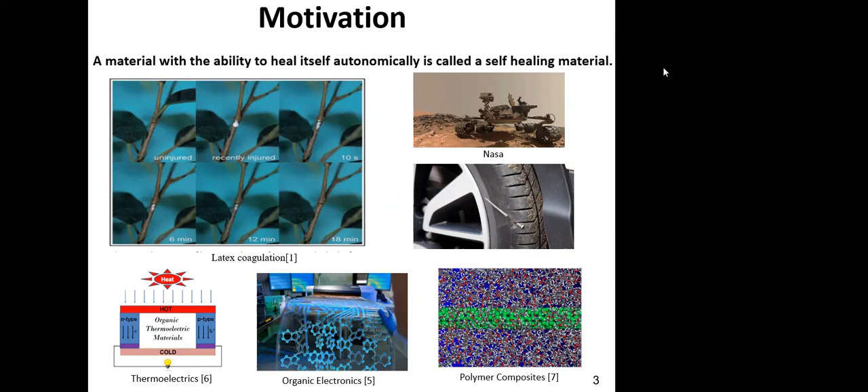As the title said, I'm going to talk about self-healing polymers. First, I would like to talk about what self-healing itself is. A material with the ability to heal itself autonomically is called a self-healing material. There are a lot of self-healing materials around us. It's a very prevalent phenomenon in the biological world, from plants and trees to humans. In human beings, from blood clotting to the repair of fractured bones, all of these involve the self-healing process.

Biological nature perfected it over millions of years of evolution. But now scientists and engineers are trying to figure out how to do the self-healing process artificially, in our engineering materials. If we can do that, it could wholly revolutionize our design spectrum. I've put an example here for you to appreciate it. This figure shows latex coagulation in a tree.

Let me get my laser pointer so you can look at it. It shows the latex coagulation in a tree. This tree is uninjured, and after some time it got injured. Then you see sequential time snapshots of how it is self-healing. After 18 minutes, it healed itself. So now scientists are taking inspiration from this phenomenon in the biological world.

So what could be the potential applications of self-healing materials? There could be a lot of applications. But the first one that comes to my mind is interplanetary missions, where NASA's Curiosity or Perseverance rover is now roaming the foreign terrain of Mars. If this vehicle got damaged, like its wheel or any other part, it's very hard to repair.

Like you need to send another mission or you need to abandon the mission. So in this case, consider if you can build some part of the vehicle, maybe its wheel, maybe some part, using self-healing materials. If it somehow gets damaged when running in this foreign terrain, if it can heal by itself, that would be the best solution. So that could save a lot of money. So that could be a wonderful application.

We are all familiar with flat tires, especially in the summer. So if your tire is made of self-healing materials, it could save a lot of money. Other applications could be polymer-based composites. The polymers have the potential to revolutionize the composite field, and also organic electronics. And last but not least, polymers have inherently very low thermal conductivity. So if you can somehow engineer their electrical conductivity, they have the potential to be in the thermoelectric field as well. And there could be a lot of other applications, you name it. So let's move forward.

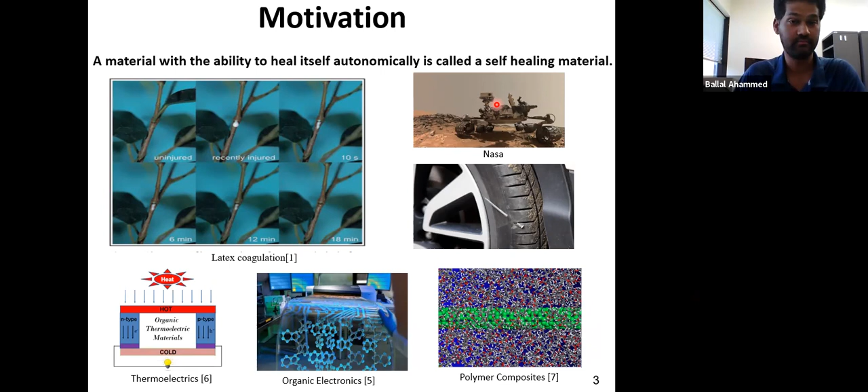Now, approaches to self-healing. There are a couple of approaches in the literature. One is called the capsule-based approach and another the vascular network-based approach. I like to describe them together because they are pretty similar. In these approaches, you have small microcapsules or tubular networks inside the material matrix, containing healing agents. When a crack appears, some capsules or the vascular network get ruptured, the healing agent comes out, undergoes some kind of polymerization or reaction, and helps heal the material.

But looking at the pictures, you can surely say that the capsule-based and vascular network-based approaches are very complicated to design. Also, they cannot sustain a large number of cycles. If it healed once and the same crack appears in the same spot or some other spot, it will not be able to heal, because the capsules or vascular network that ruptured won't come back. So the number of cycles it can operate is very limited.

Lastly, another approach is called the intrinsic approach. It can be done by reversible reactions, hydrogen bonding, ionomeric coupling, or molecular diffusion. In my project, we have used this intrinsic self-healing approach. In our case, the atoms are capable of dynamic bonding. They can associate and dissociate, again and again, based on thermal fluctuations or external stimuli from the environment. So there is no restriction like the capsule or vascular network. They inherently have dynamic bonds, which help them heal by themselves.

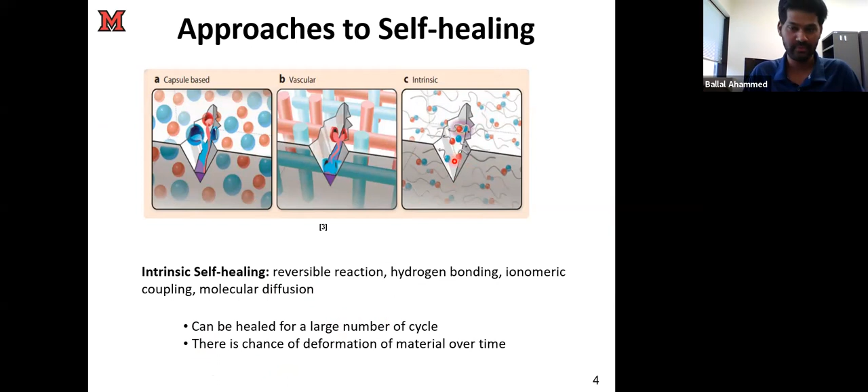As there is no capsule or vascular network, it can be healed for a large number of cycles. But the disadvantage is that there can be a chance of deformation of the material over time. So let's now put all our concentration on this intrinsic self-healing approach, as we have implemented it in our materials. Okay, let's move forward.

The objective of this study was basically modeling the self-healing behavior, the mechanical properties, and the thermal properties of these materials. The method we used is a combination of experiments and simulations. For the experiments, we have done rheology tests and tension tests. For the computational part, we used molecular dynamics simulation, specifically coarse-grained classical molecular dynamics simulations, which I'm going to talk about soon.

Now let's talk a little bit about coarse-graining and our model for the polymers. If you look at polymers, they are very complicated. They are not periodic structures where every atom sits in a periodic lattice with a well-defined structure throughout the whole simulation. Polymers are kind of a fluid that flows, and their behavior is certainly very different from that of regular periodic solids.

So if you look at the atomistic models of the polymers, they are very complicated: you have one monomer and then another monomer, and they link together. A monomer is a molecule with a lot of atoms associated with it, and they have internal degrees of freedom. So it is very complicated to model the polymers atomistically if you don't want to miss any details. It is computationally very expensive, and it also takes a lot of time to simulate them.

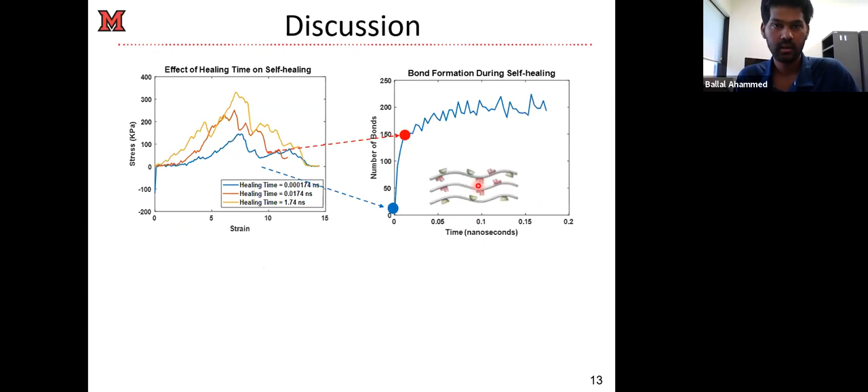So when we looked into the bond formations between the crosslinkers, we found that this bond formation between the different crosslinkers during the self-healing time increases very rapidly at the beginning, and as time goes on, it flattens out, because those pairs find each other. In some cases, they are not capable of finding each other.

Originally the rate is very high, because there are a lot of crosslinkers available to find each other and crosslink. The other pairs may remain unable to find their pair, so they remain uncrosslinked. So the bond formation increases exponentially, and then it flattens out. In our case, the main resistance during the tension test is mainly coming from these crosslinkers. So when you have a large number of bonds, you have more resistance, and the properties will be better.

So in our case, when the self-healing time is very low, at 0.000174 nanosecond, very close to the origin, you have a low number of bonds, so you have low peak stress. When you allow more time for the material, you have a large number of crosslinking bonds, so you have better properties.

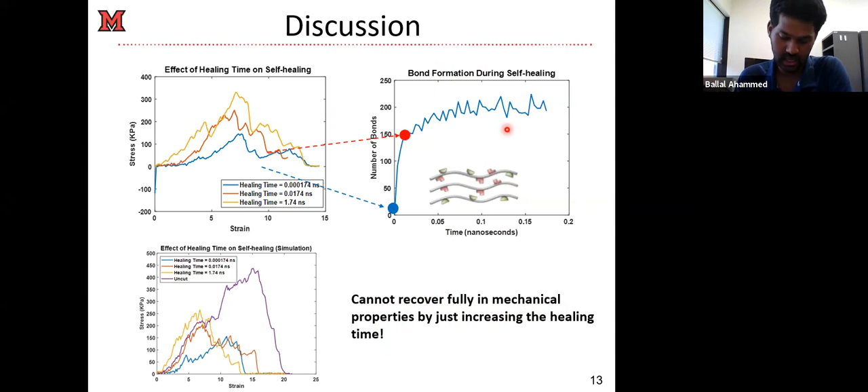So now the question is where that energy is going, because energy cannot be destroyed. It needs to convert into some other form of energy. So that could be interesting. That could lead us to some interesting fact. So where is this energy going? That's a big question. So let's move.

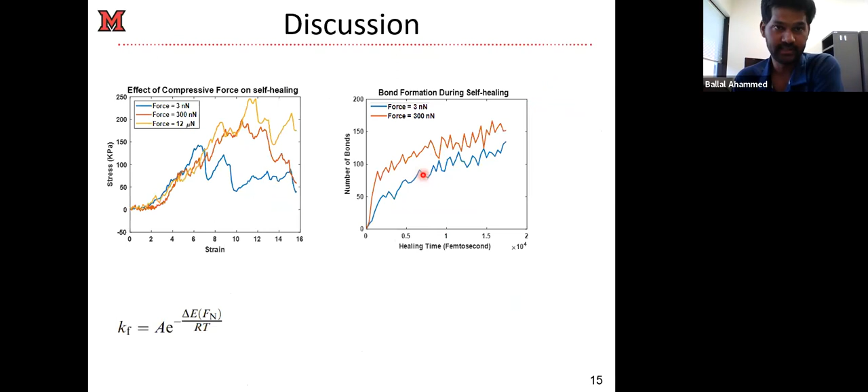So we found the effect of force on the bond formations, and we have found that when you apply more force, it accelerates the bond formation process. If you look at these two plots, they clearly show that when you apply more force, the bond formation process is accelerating. Okay, now we can anticipate that this compressive force is actually helping the material to do better.

So in terms of bond formations, now we can say that the strain energy that disappeared in our previous cases is now helping the material to form more bonds. So the strain energy is now being converted into the chemical energy inside these bonds. So that is actually helping the material to recover better.

So now we can think in terms of the classical Arrhenius picture that we studied in our first year chemistry courses. We know that for a reaction to happen, there is a potential energy barrier. When you apply the force, you are reducing this energy barrier, reducing this activation energy, which makes life a little easier for the crosslinkers to come together and bond. So this compressive force is changing the energy landscape and allowing the bond formation to be easier.

So if you see this rate of forward reaction from the Arrhenius type equation, it depends on delta E, the activation energy barrier, which is a function of the compressive force. So this energy barrier can be engineered using the application of compressive force, which in turn helps the reactions be faster, accelerates the self-healing process, and helps the material recover its properties so well. So that is the end of our self-healing study.

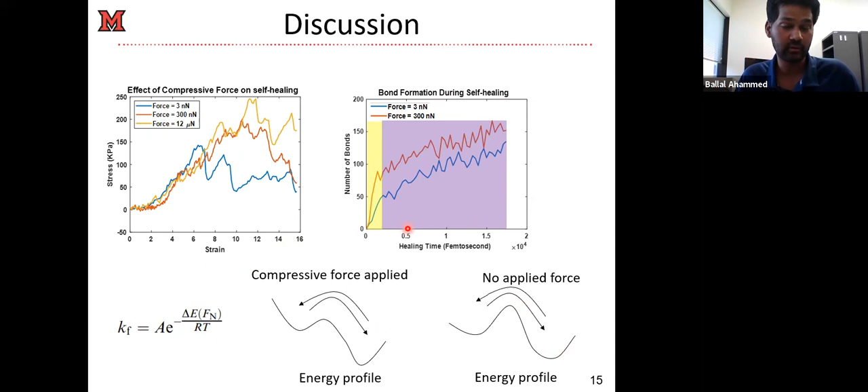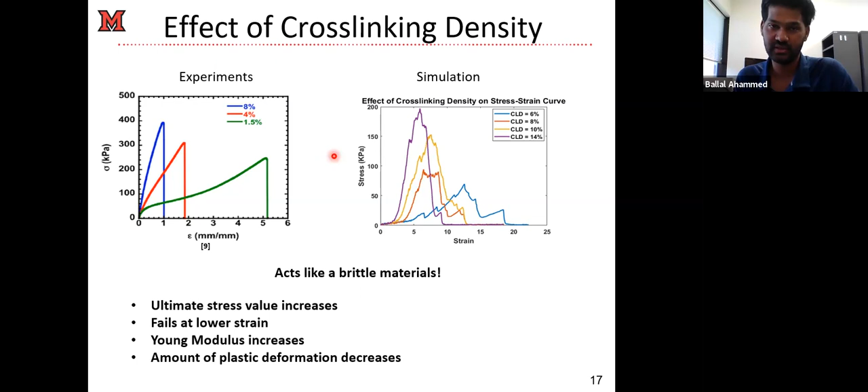So that means our model is working, because we're getting the similar trend. It is able to capture the physics that's happening inside the material. So that's a good sign. So let's move forward.

So now the big questions, as I mentioned previously, of the IPN and the SN polymers. When our colleagues did the rheology test for the SN and the IPN polymer, they found that the IPN polymers always outperform the SN polymer in terms of mechanical properties. So they were wondering why the IPN polymer is better than the SN polymer. They don't know the reason, because they don't have access to see what's happening inside the materials atomistically. So we try to answer these questions using molecular dynamics simulations.

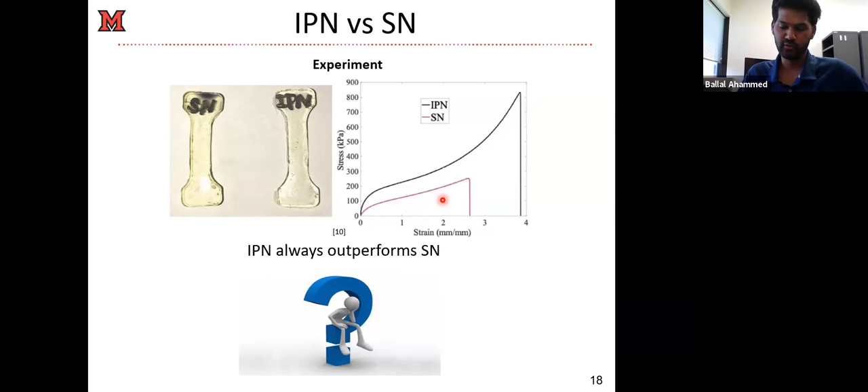So that's a good sign. That means our model is good. It is able to capture what's happening inside, at least trend-wise. So that's not bad. So now we try to answer the question why the IPN outperforms the SN. As I mentioned previously, the difference between those two network structures comes from the cross-linking. In one case, we have only one type of crosslinker in one chain, but in the SN case, we have both types of crosslinker in one chain.

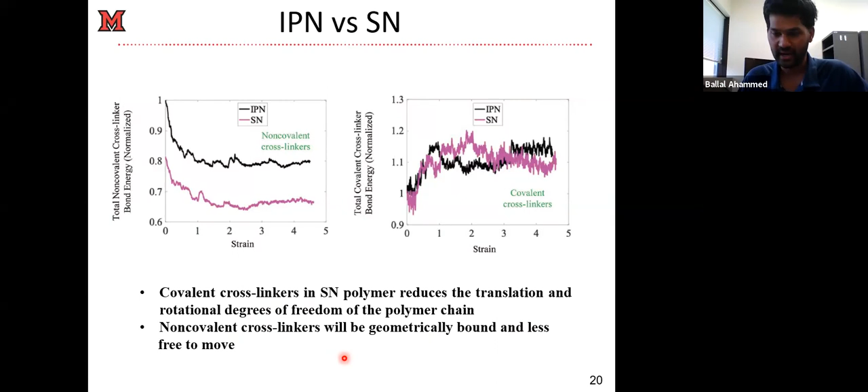Then we did some thermal properties study using molecular dynamics. So let's look at a couple of our studies for the thermal case. For the thermal case, coarse-grained molecular dynamics simulations are not an ideal playground for heat transport, because you lose a lot of degrees of freedom. So your thermal conductivity will not match with the experiments. We didn't even try to do experiments on thermal transfer measurement, but we are able to get some trends right for our case.

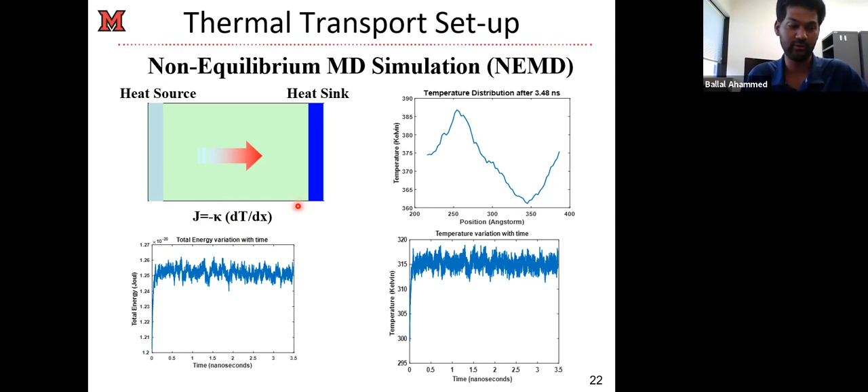So we use the non-equilibrium molecular dynamics simulation, as you may be familiar with. We define heat sources and heat sinks. When our system equilibrates, we get our temperature distribution, which is a straight line from the heat source to the heat sink. When you plot this temperature distribution, you get the slope by fitting a line, and you also measure the heat flux from your MD calculations. After that, you can calculate your thermal conductivity. So that is the method. Now let's move forward.

When we think about heat transport, we think in terms of phonons. In a single chain, when a phonon propagates, it is less scattered because it doesn't have any crosslinkers or any other stuff. So the phonon can propagate easily because there is no aperiodicity in this single chain. That's why we have a larger thermal conductivity, almost 2 orders of magnitude more than the IPN and SN.

For the IPN case, as you remember, it allows more bond formation. The approximate way to think about it is that more bonds in the IPN means more routes for the heat to transport. As a result, the thermal conductivity increases. For the SN case, there is less bond formation, and the structure is more irregular in comparison to the IPN. That's why it leads to more phonon scattering, which reduces the thermal conductivity.

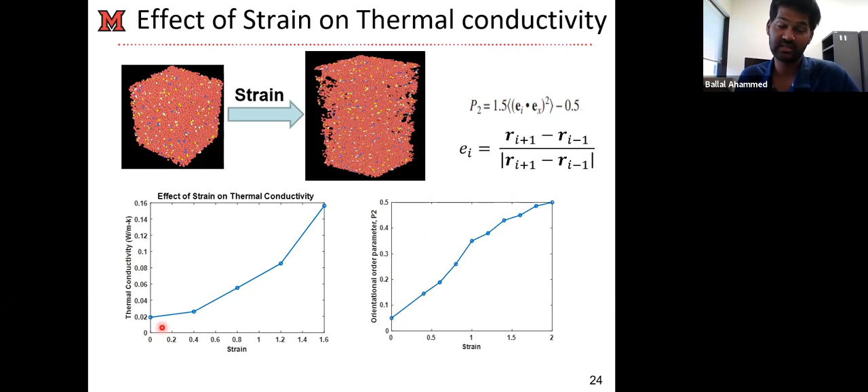The reason for that is the more cross-links means the more bonds, and more bonds provide more routes for the thermal transport. That's why at the beginning, when you increase the cross-linking density, it increases. But when you have too many bonds, it creates an aperiodic behavior, which increases the phonon scattering. When a phonon propagates, it soon gets scattered by other phonons because of the aperiodic nature of the polymer. So when too many routes exist, it reduces the heat transport at a very high cross-linking density.

Then we study the effect of temperature, how the temperature affects the thermal transport. At the low temperature regime, we found that it increases with the temperature. At very high temperature, it gets saturated, and even starts to decrease. When you think about thermal transport, the thermal conductivity is proportional to the specific heat capacity, the square of the phonon group velocity, and also the relaxation time of the phonon.

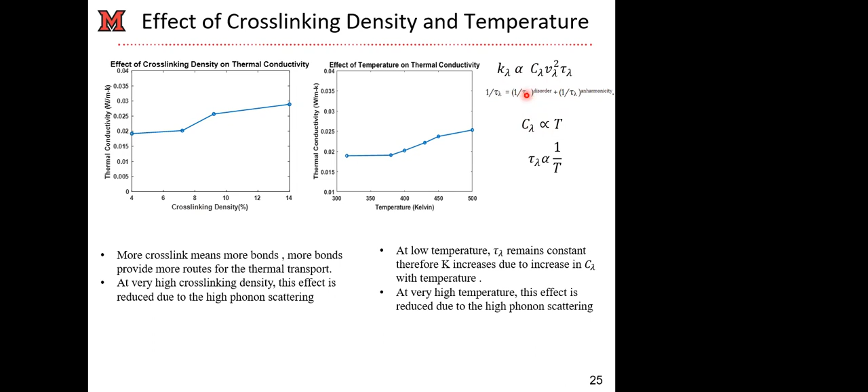And I'd like to mention that the 1 over relaxation time is called the scattering rate for the phonon. This scattering rate comes from the disorder and the anharmonicity. In our case, our polymer is perfect, so it has no disorder. So this term actually vanishes, and the main rate comes from the anharmonic contribution.

Anharmonicity means that in the ideal phonon picture, the atom vibrates at the bottom of the potential well to and fro. But when you increase the temperature, its energy level gets shifted from the bottom of the potential well to higher. So now the potential well is no longer symmetric, it's more asymmetric. That's what is related to anharmonicity: the potential well is no longer harmonic, no longer parabolic.

That dictates the properties. So at low temperature, this tau remains constant. Therefore, K increases because we know that C lambda increases with temperature. Tau doesn't change that much at low temperatures, or has less influence. So the thermal conductivity increases mainly due to the increase in C lambda.

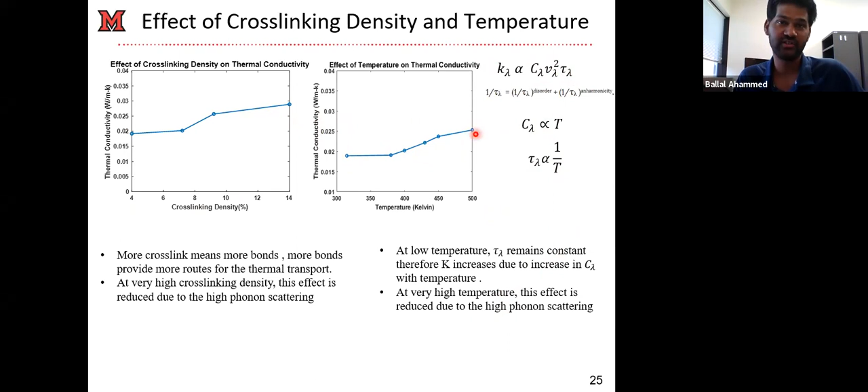But at high temperatures, the scattering rate increases with temperature, so the relaxation time goes down, which overcompensates C lambda. As a result, at elevated temperature, K lambda starts to decrease for a specific phonon mode. If you sum over all the phonon modes, it gives a negative trend. That's the qualitative explanation for the results we found from the MD simulations, and that's the end of our thermal conductivity study.

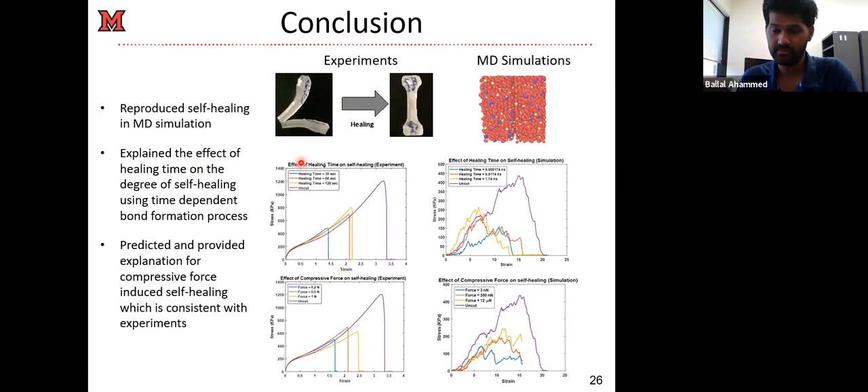To conclude, we are able to model self-healing using molecular dynamics simulations. We found the same trend that our experimental colleagues found, and we explained using atomistic details what is leading to the self-healing process. We were also able to answer questions like why the IPN outperforms the SN.

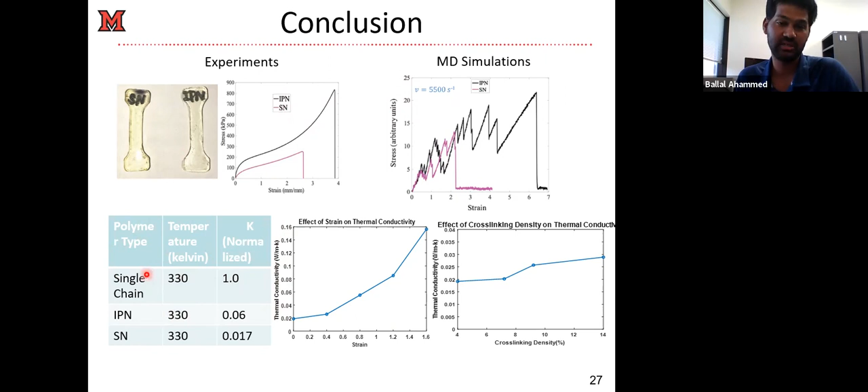Our qualitative explanation for the thermal conductivity matches what we found in the literature, and it hints that the IPN polymer is superior in terms of thermal properties to the SN, as we know the IPN is better in terms of mechanical properties than the SN. We found evidence that it is thermally superior, but we haven't done the atomistic case for the thermal conductivity. That would be an interesting thing to look at in the future.

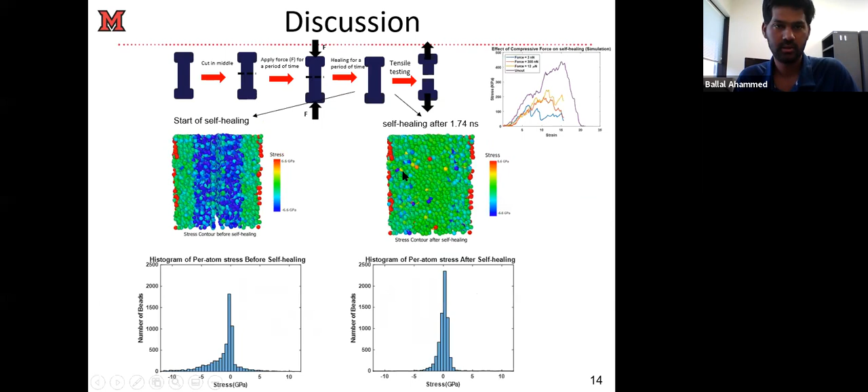For the invisible wall, you can set a repulsive wall. There are a couple of commands which use a repulsive LJ potential. Just search the wall command on the LAMMPS website. In the wall command, you can specify the location of the wall, and you can use the LJ parameters to make it repulsive.

Search the wall command, and then you can set the repulsive forces using the LJ properties. You can set your equilibrium distance and all of the interaction parameters so that it repulses the other atomic species. You need to define that it repulses the other atomic species.

You can also define how small your repulsive region would be. That's set up by the wall commands using the LAMMPS website. You just search repulsive wall or the wall command in LAMMPS, and you need to set up your parameters nicely so that you have nice repulsive walls, and you also need to specify how thin your wall would be. So you just search the wall command.

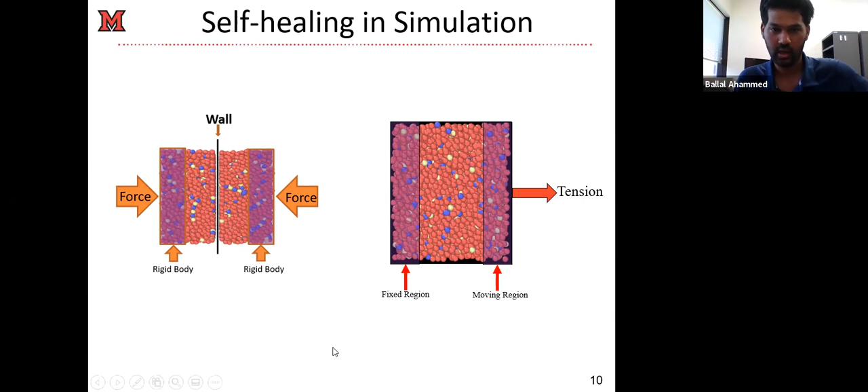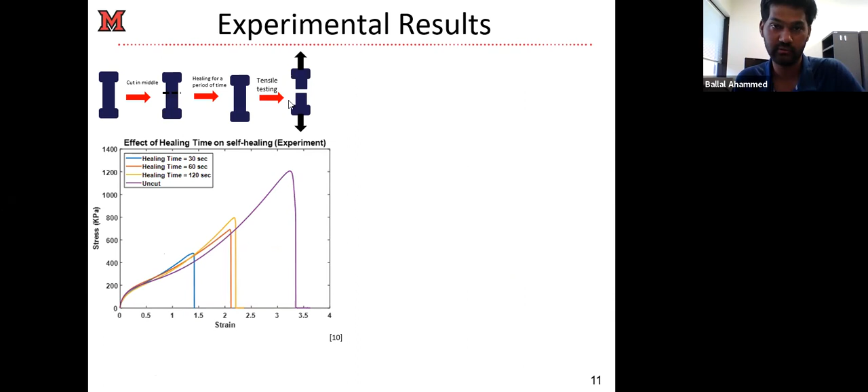I hope that explains. If you have further inquiries, you can always contact me. If you need to know, just search it and you'll find it; you need to do some basic search.

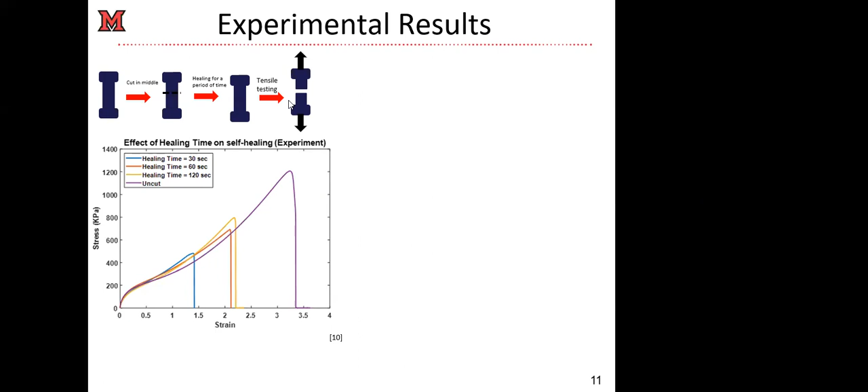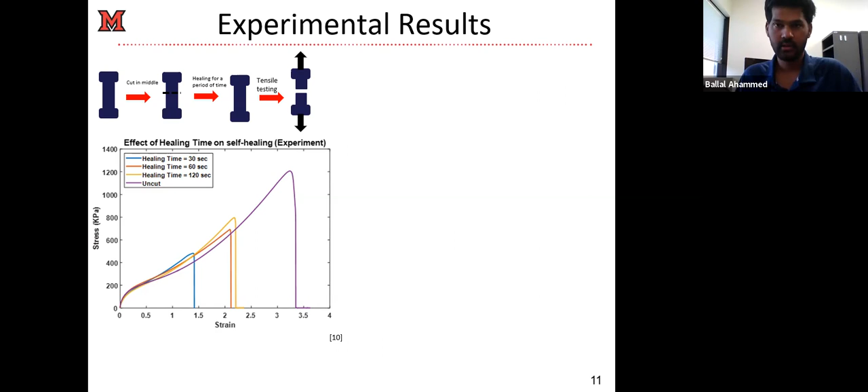Yeah, sure. The first question I have is: were both covalent and non-covalent crosslinkers modeled using the same potential like LJ, or was LJ used only for the non-covalent linker and covalent interactions were modeled using some other potential? Okay, that's a good question. Let's go back to where we have seen those bonds.

I'd like to mention here the covalent bond is not modeled using LJ. You can define bonds in LAMMPS, right? You can define a spring between the two beads. So this is not an LJ interaction. Let me just get the pointer option. Okay, so the covalent crosslinker is not LJ. It's a user-defined bond. You can define bonds between two atomic species using a spring, and also specify the spring constant.

There is the FENE potential in LAMMPS. You must have heard about it, the FENE bonds. You can use that for modeling this kind of covalent bond, and you can specify when it will fail, and also specify the stiffness of those bonds. So this is not LJ.

The non-covalent crosslinker is modeled by the LJ interactions, that is the non-bonded interaction. You can set up the particle type, and between two particle types you can set up the interaction parameters to be attractive. When they come within a certain range, they will attract and form non-bonded interactions. So that's how the non-covalent bonding is described in our model. I think that answers your first question.

Yes, thanks. The second question is how were the IPN and SN structures modeled? How was it coded? Okay. For the SN case, let's describe it first. For the SN case, you have one polymer chain, right?

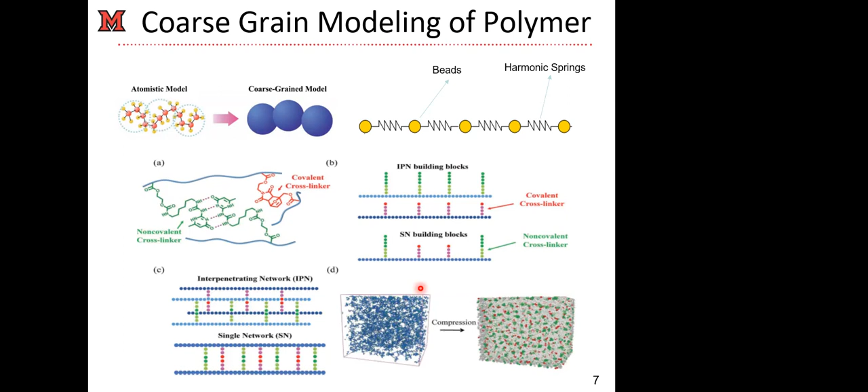Thanks. The last question is about the bond creation and breaking: was it done using any other fixes, or is it programmed inside the FENE potential you mentioned? Oh, it can be done. For this covalent crosslinker bond formation, it is done even before the start of the simulation. We define between which types of crosslinker there will be a new type of bond, where you can define different particle types.

So we define the different particle types. When you start the simulation, we said that if these two types of particle, which are responsible for the covalent crosslinking, come within a certain distance, then LAMMPS will decide that there will be a FENE bond between them. As I remember, we did it with some kind of fix. You can just search the FENE bond in LAMMPS; probably there is a fix associated with it.

I have used that, but it's been almost 2.5 years, so my knowledge may be a little bit rusty. You can just search the FENE bond in LAMMPS. I guess we defined a different particle type, and in the simulation, when these two particle types come within a certain distance, we define the new bond, which is maybe done by a fix, I guess.

Thank you so much. No problem. Yeah, these are really good questions. I think there are lots of details he was asking.

Let's move to the next question from Anshuraj. He's asking, to create the cross-linking polymers, what software did you use, and what should we bear in mind as we write the code? Okay, so in our case, it was a handwritten code. We haven't used any software to do that. We have written our own code.

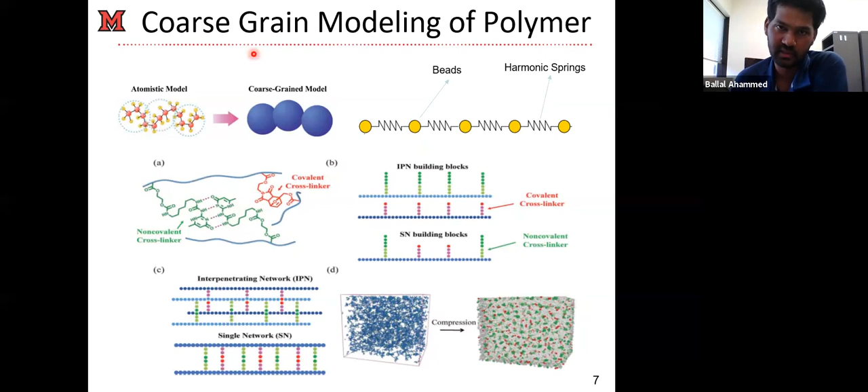Okay, so that's really a very good question, actually. The effect of the time and length scale is, of course, I think, if you think in terms of the implication from the length scale, normally the materials in the bulk scale have a lot of defects. In comparison, in our models, there are no defects. But in the real ones, there could be defects. Maybe crosslinkers are missing. Maybe you have other kinds of defects.

Which would, of course, depreciate your mechanical properties and thermal properties as well, which we don't have here. So I guess to make it even more realistic in the simulations would be really hard, because you need to insert some defects and other kinds of things to simulate the bulk scale behavior. Other than that, I don't see that.

Other than that, of course, we are missing a lot of atomistic details in our case, because we are using coarse-grained simulations. So that could also lead to the difference between the bulk scale effect and the nanoscale effect. That actually comes from the modeling part, like how you model your polymers.

For the time scale, I would say the properties that really depend on very large time scales, like if you want to model the creeping behavior, where the material deforms over a very long time scale, maybe the result would be different for the creeping behavior in our simulation cases in comparison to the experimental results. I guess there could be two issues, like the defects and large, I mean, very slow time-dependent deformations. So in our case, we're probably missing those.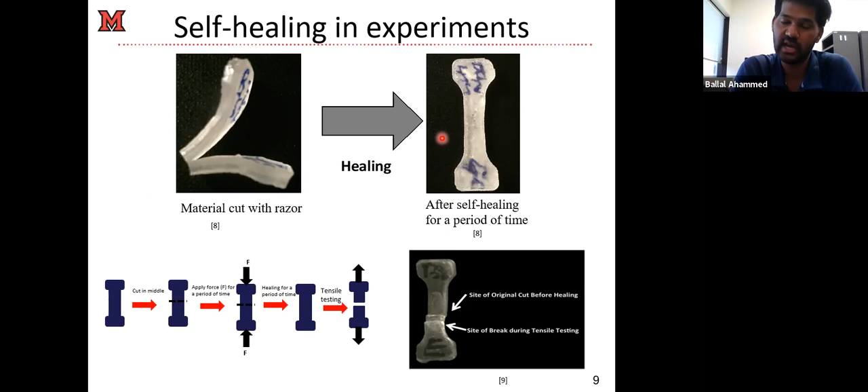interactions. One is the bonded interaction, which we have modeled with the harmonic spring, and the other one is the non-bonded interaction, which is the LJ interaction, right? Both of them are available in the literature, so we don't need to find any others because we didn't use the atomistic case. So it's very simple, actually. Yeah, very simple. I would like to expand a little bit on your question. This is a really good question.

If you see our experimental results and our simulation results, there is a lot of difference. So we are just looking at the trends, right? We are not expecting too much from this model because this is a very simplified polymer model. And also you see that the stress-strain curve is not even smooth, because this roughness is coming from when you stretch the system, those covalent and non-covalent bonds are breaking. When those bonds break, you see certain jumps in your

stress-strain curve. And also in some cases the results may be very unphysical, because you cannot ignore the unphysical effects in your simulations, since the model is very, very simplified. So we just intended to capture the trend. That's our success, I would say. More or less it was able to capture the trend and explain some features of it.

I think an atomistic study would be really interesting. In this case you would need to use a reactive force field in order to model those dynamic and covalent bonds, I think. That would be a really interesting study, to see what happens when you scale it even further down and what we get out of this. Yeah, that's a very good question.

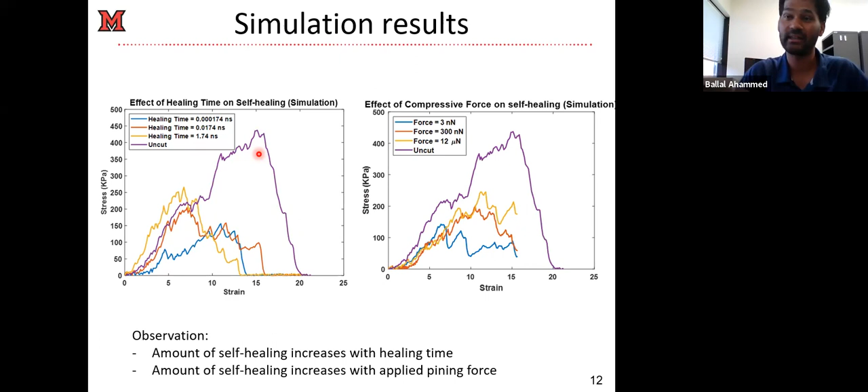Yeah, in this slide I can see your strain is 20. Is that 20% or are you going up to 20 times? 20 times, actually. It's very large. These are rubbery-type materials, so you can stretch them a lot. And also, as I mentioned, the strain is something like 20 here, but if you look at the experimental results, it's 3.5. Yeah, 3.5.

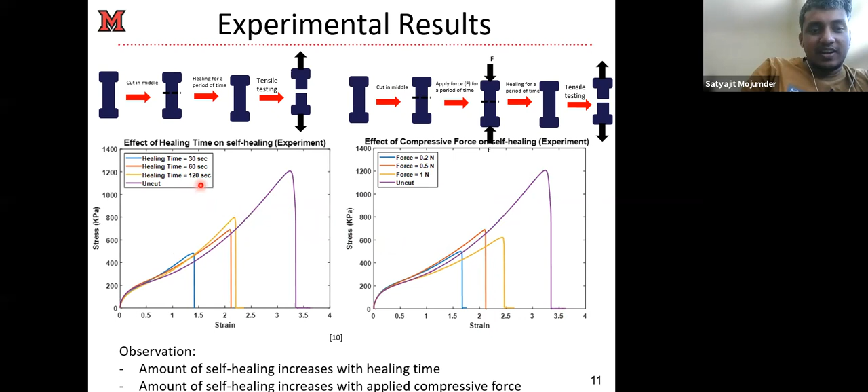I was also looking at the stress values. It seems like your experiment is giving higher properties compared to your simulation. Your bulk experimental sample has defects, the MD samples don't have defects, but you're still getting the lower value. Yes. I think the answer would be tuning the LJ parameters and the covalent parameters, which we are not interested in, because we don't want to match the values with the experimental results in the first place.

Yeah, there is always this discussion. With the simplified model you're using, if you submit to any journal, the reviewer is going to bash you: how do you get these good results with this kind of very simplified model? Yes, that's a very big question. Sometimes the question arises of how you validate with experiment. I think we should ask the question the other way: can you do a nanoscale experiment? That may answer some of our questions. So probably that is one way to go.